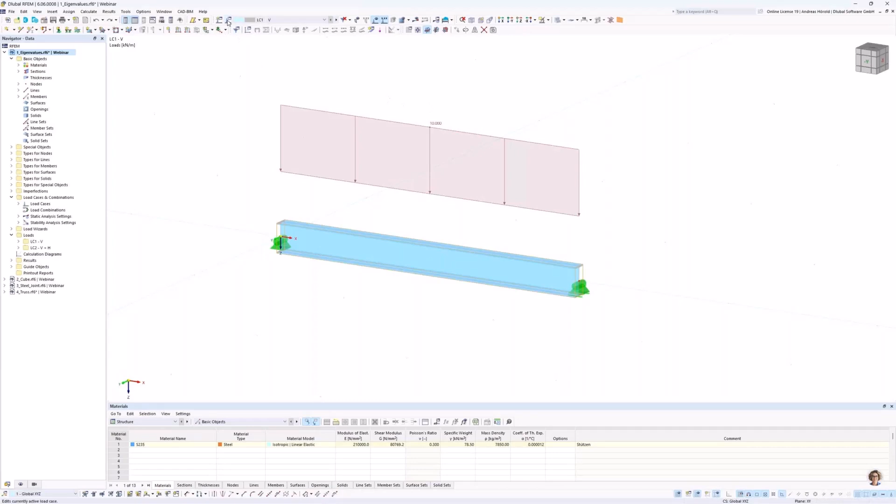I go to the settings before. You can see that 'calculate critical load' is checked with the structural stability add-on. Let's go to these settings. We would like to determine the 25 lowest eigenvalues. Okay, I calculate the load case.

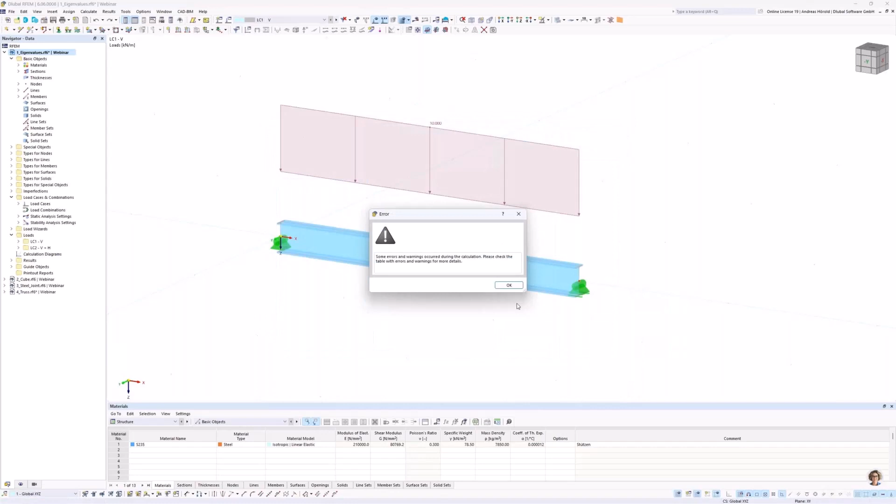There's only a load in the Z direction. So we see that error message, too many buckling shapes. The reason in this case is that no compressive force occurs in the beam, so the eigenvalue solver cannot determine any buckling shapes.

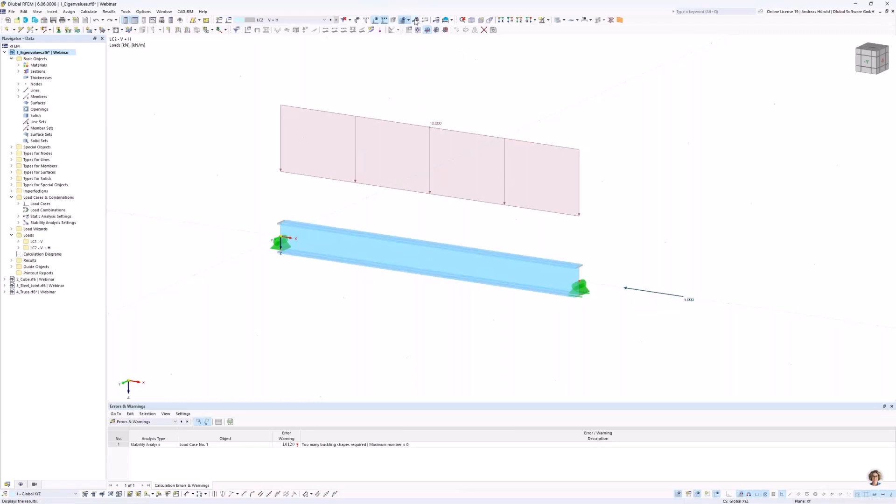Let's turn to the second load case with a compression load. We calculate it. In this case, we don't get an error message—that's the error message for load case 1. We go to the stability analysis, and in the navigator results on the left above, we can see the different eigenvalues. Again, we can go through them.

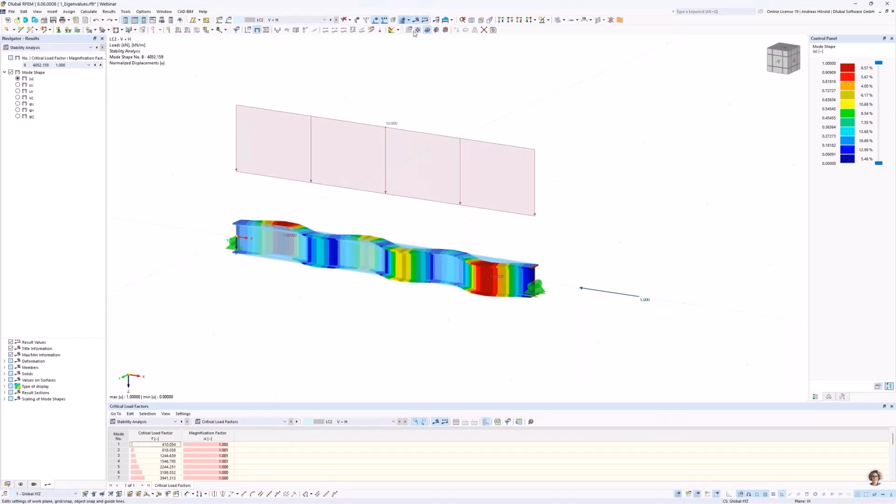But when we go to the FE mesh settings and to the members, there is a member division of 24 set, and we change the value to 2. Okay, and apply. Then we calculate the load case again. Now we get quite the same error message: the maximum number is 14.

Why is that? This is due to the mathematics used in FEM. The global stiffness matrix of the structure has a certain size, which only allows a limited number of eigenvectors and ultimately eigenvalues. Through mesh refinement, the stiffness matrix becomes larger and therefore has more eigenvalues.

Let's change it back again in the mesh settings. I enter the standard value of 8. Okay, and we calculate the load case again.

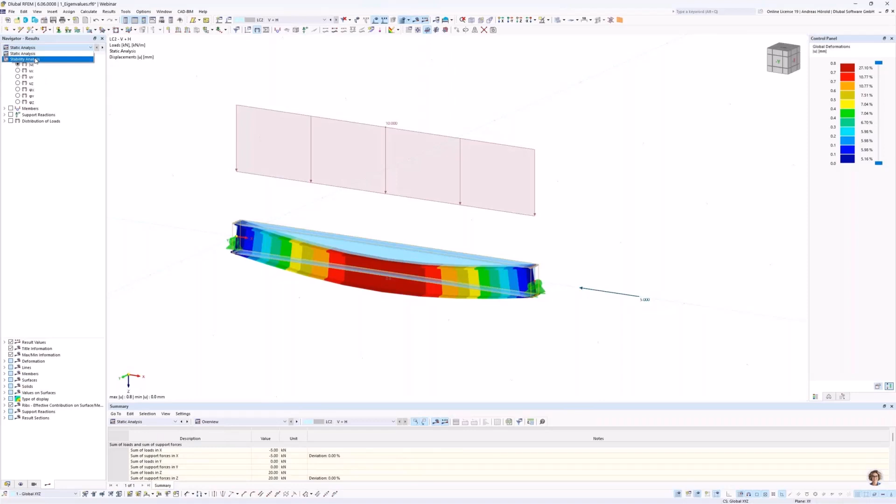In the navigator results on the left above, we change to display the stability analysis results, and we go through the different eigenvalues. You can see that's not a correct or a good eigenvalue because of the mesh refinement or mesh setting of this member.

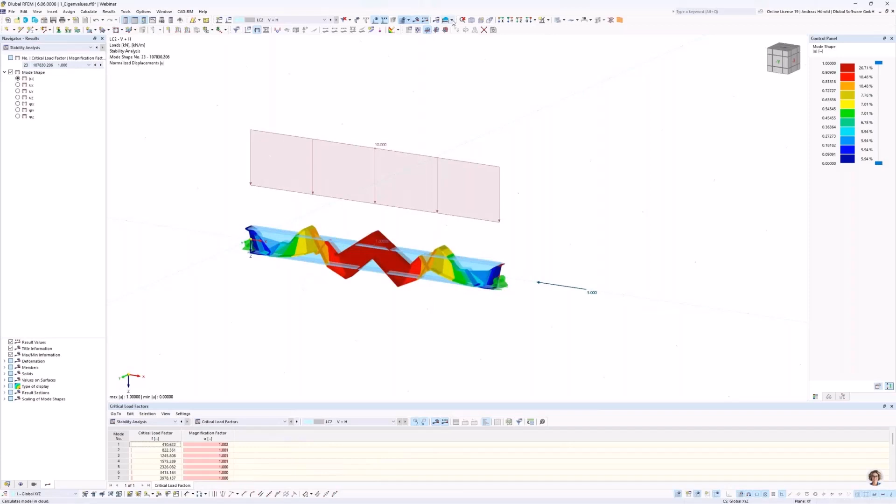I would change it back again—sorry, here, mesh settings, 24. Okay. After the calculation, it should look better. And here, as in any FE calculation, let's go through the eigenvalues.

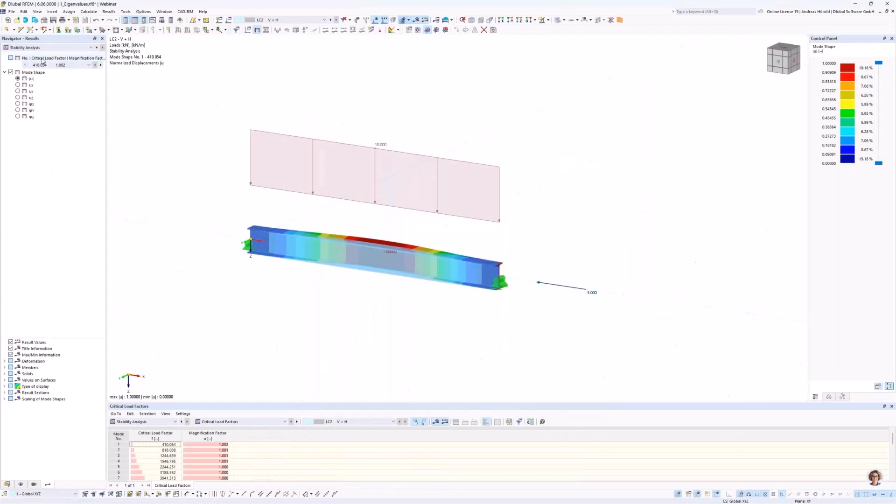Those eigenvalues look quite better. Here, as in any FE calculation, the principle applies that the FE mesh should be kept as coarse as possible, but at the same time as fine as necessary.

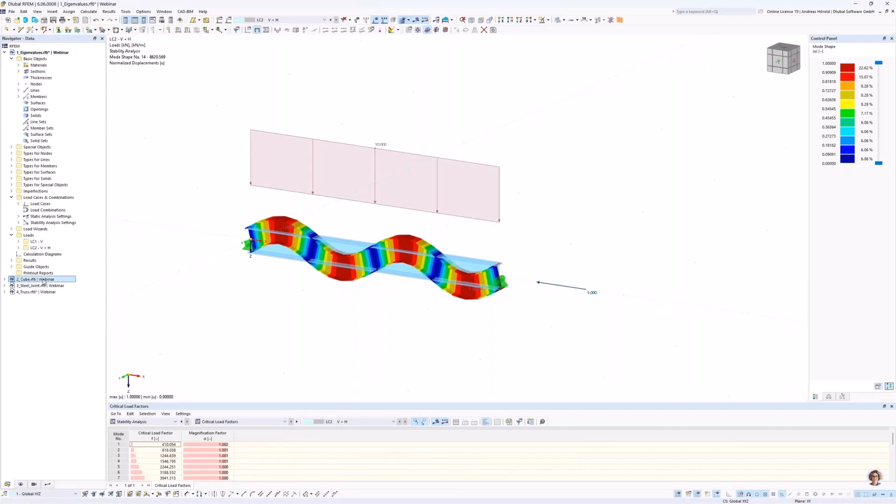Okay, so then we turn to the next model and the next question. Next question is, how can I quickly and easily insert an opening in a solid body in RFEM 6? Now the basic shape here is a cube. We now want to insert a rectangular opening and a rectangular pocket into it.

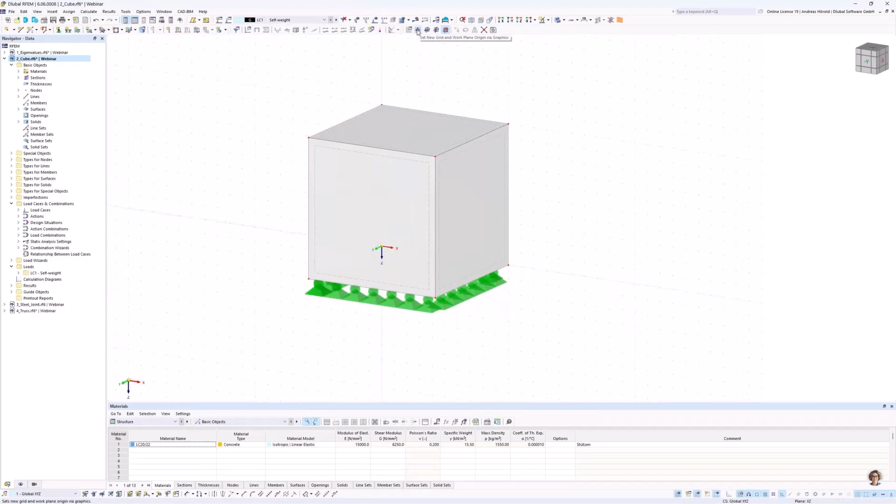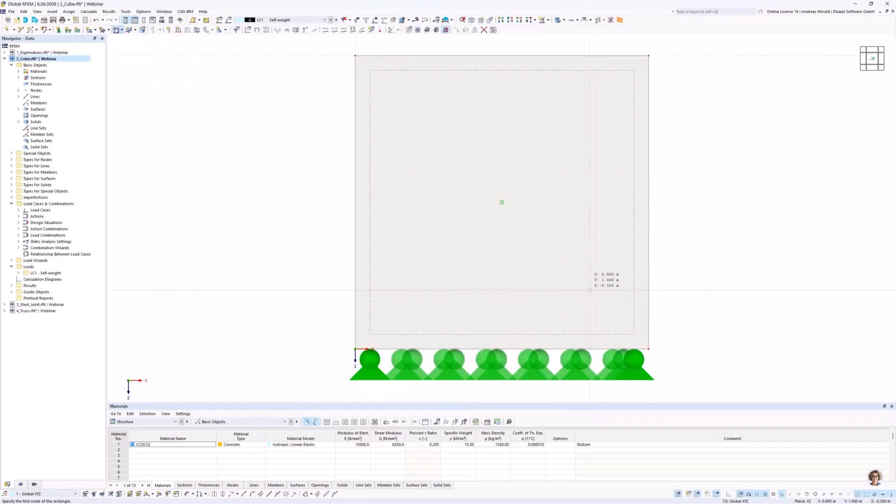So we change the work plane into XZ, and with that button here above, we set a new grid and a new origin. I click on that edge. So, and now the front is our work plane. I change to the -Y view. So, and we start with the rectangular opening left above. So I enter the opening.

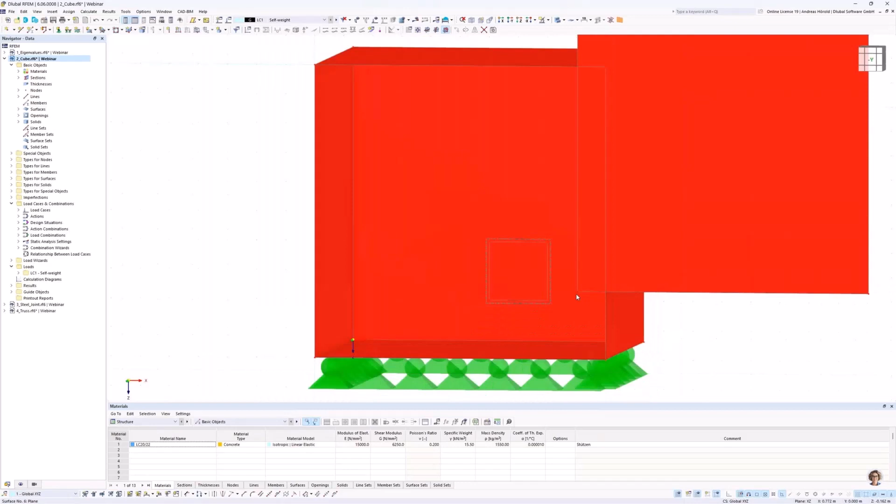And then I would like to copy that opening. Just a small tip. I would like to enter a window around the opening, and when I do that, I destroy the cube, or I drag and drop the surface. How can I avoid that?

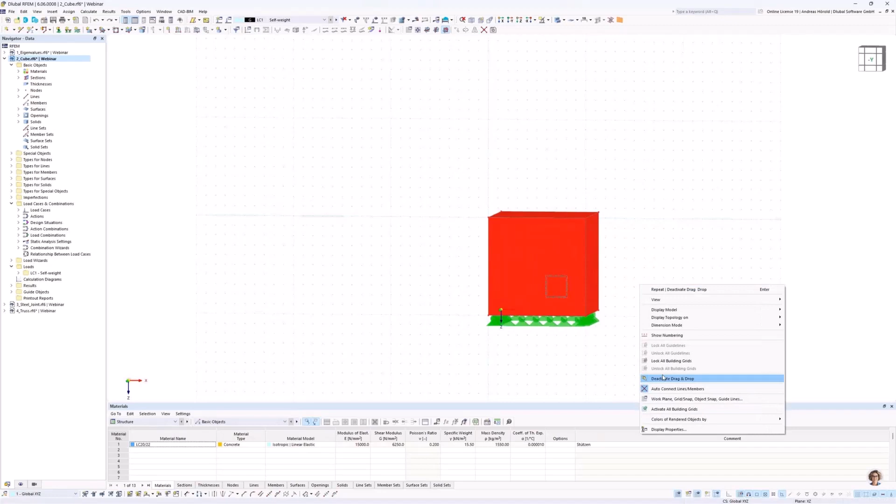I undo that. So with a right click in the empty user interface, I can deactivate the drag and drop function. And then I can select the opening, or the other possibility is I change it back. I activate the drag and drop, and I press the Alt key, and then I can also deactivate the drag and drop feature for this time.

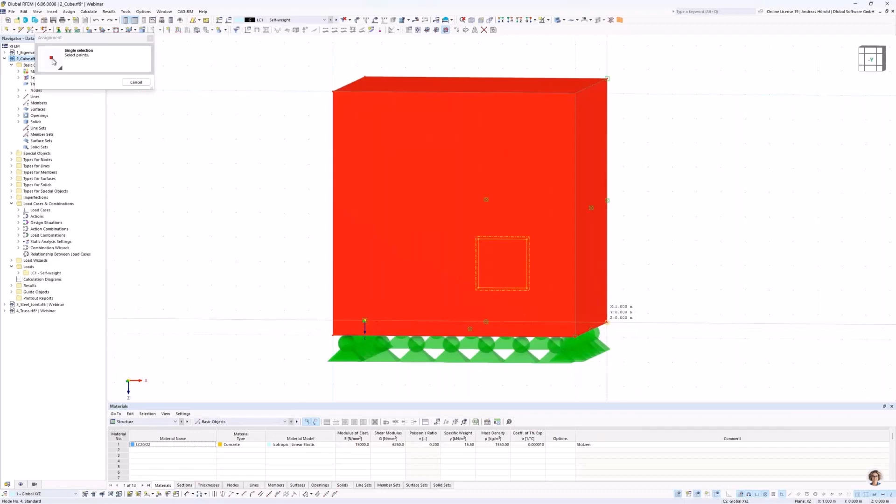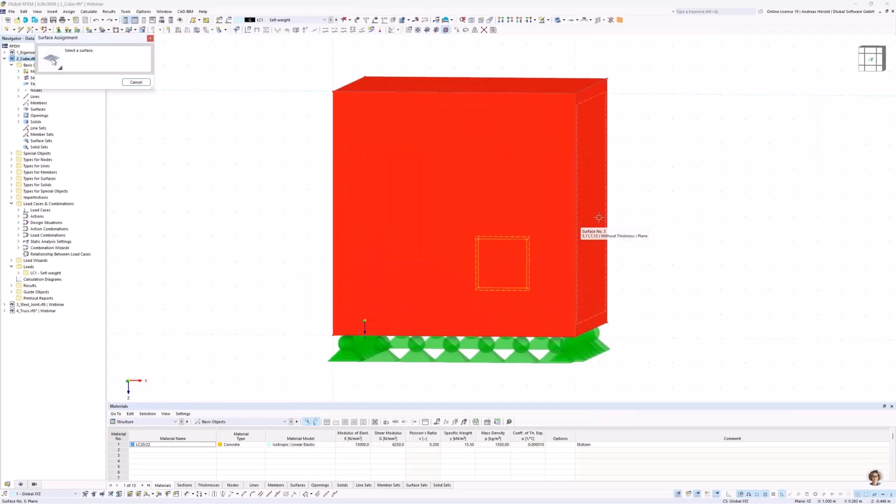Okay, so then above, move copy selected objects. I create a copy. The displacement vector should be from the front to the back. Okay, and I activate the step links. Then I select link nodes with line and link line with surface. And I have to select the surface in the graphic. I select this one. Okay. And that's all. And now the opening is created.

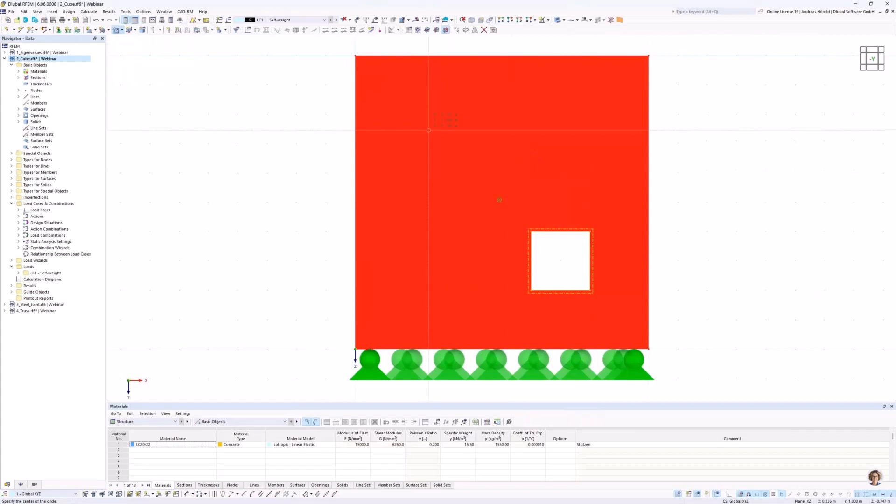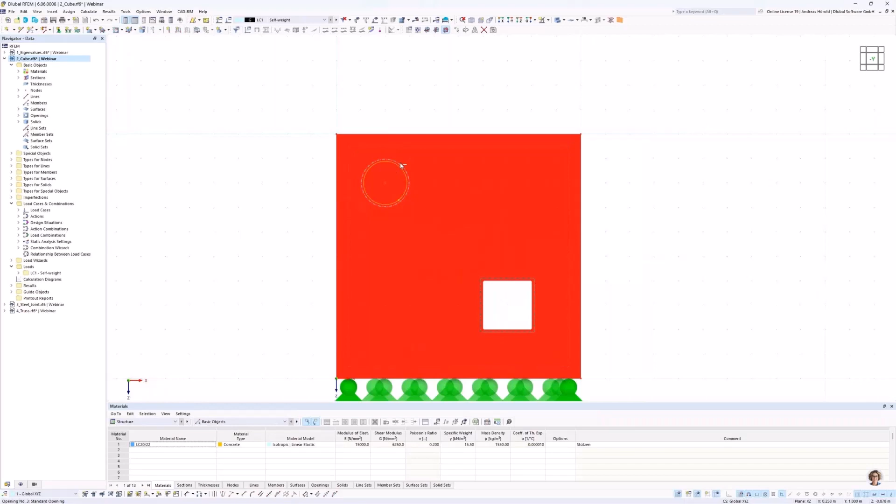So then we continue with the circular pocket, or rectangular. We do a circle. Okay. So let me search the grid. Okay. So that's the opening. And now I select all, but not the opening. I press the Shift key and deselect the opening. I would like to copy only the line.

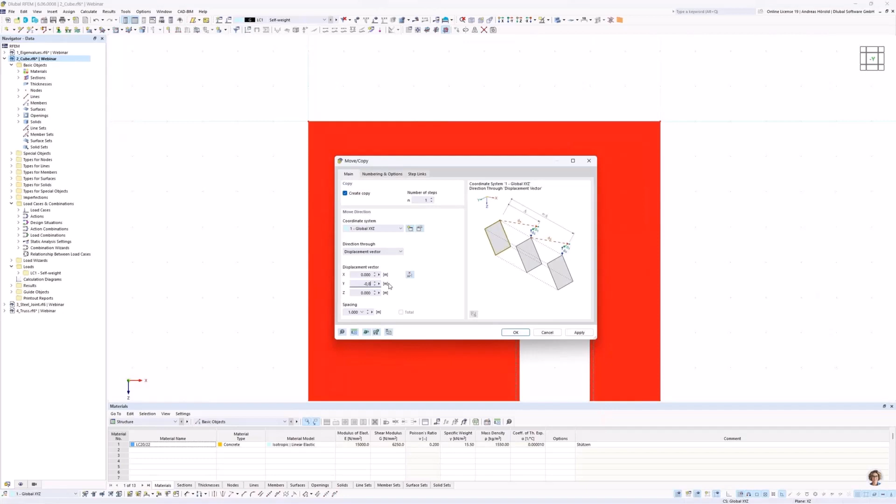So go back to move copy selected objects. The program remembers the last entries. So I enter 0.8 here and leave the settings for the step links. Okay. Now only a circular surface is missing.

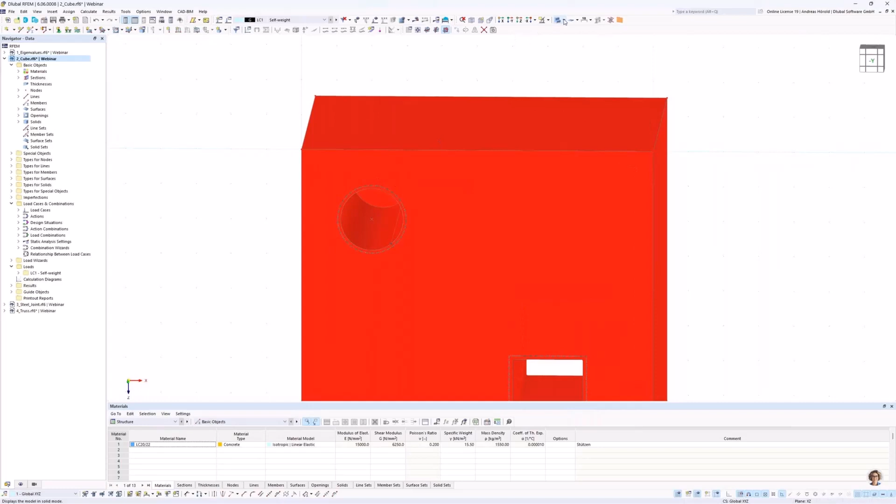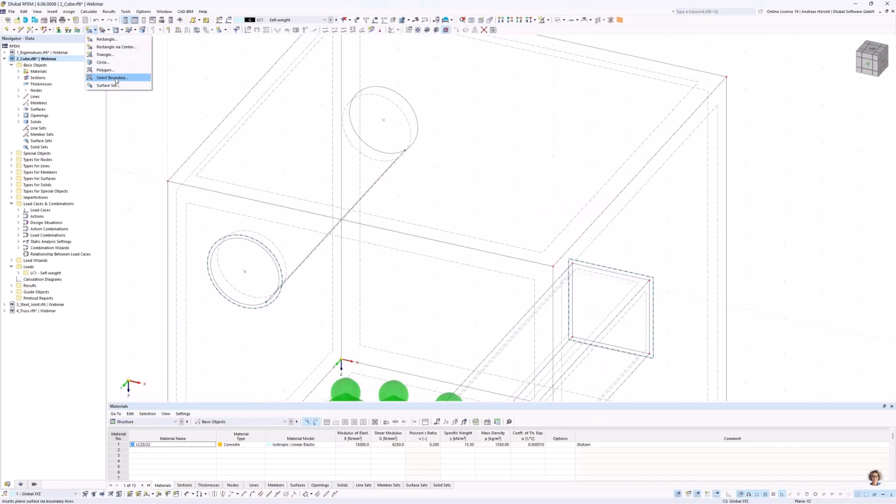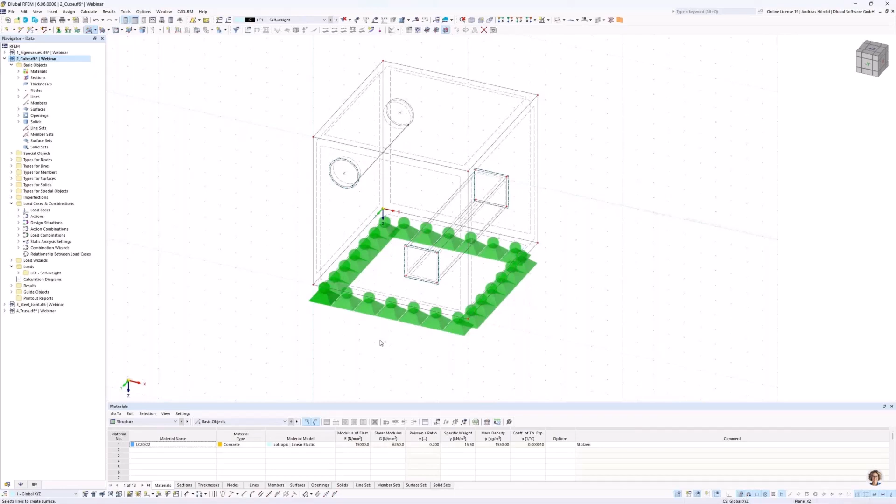I switch to the transparent model, or better to the wireframe model. And you can see there's no surface here. So that's why I select the boundary lines and create a surface. Stiffness type should be without thickness. Okay, and select this line. Okay. So that should be all. So I can go back to the transparent model.

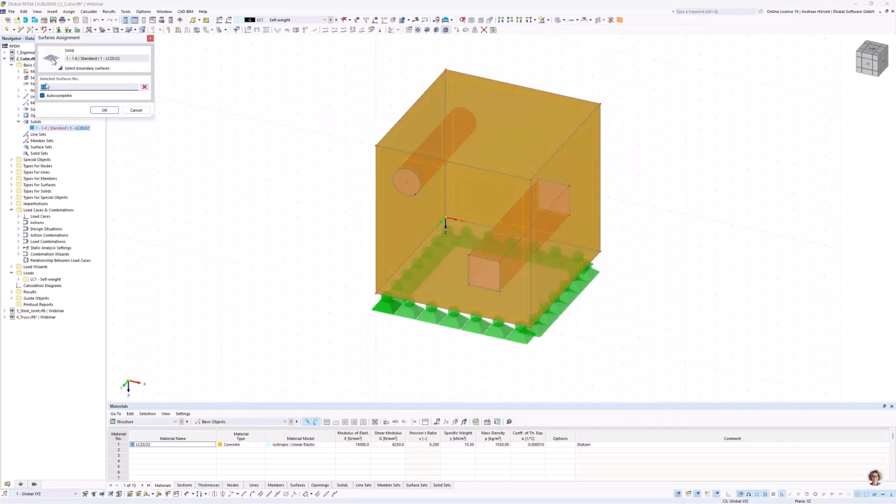On the left side in the navigator data, you can see the solids, and now it's in red color. The solid is not closed anymore. So how to correct it? I double click on the solid and I have to select the new boundary surfaces. So I clear it. Okay. And select all. And now all is correct again. We can mesh the cube. Now the solid is complete, and we could calculate it.

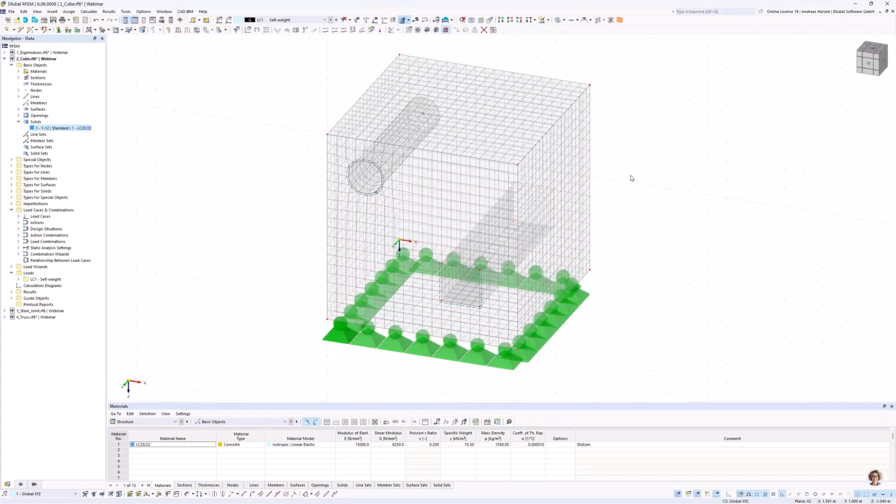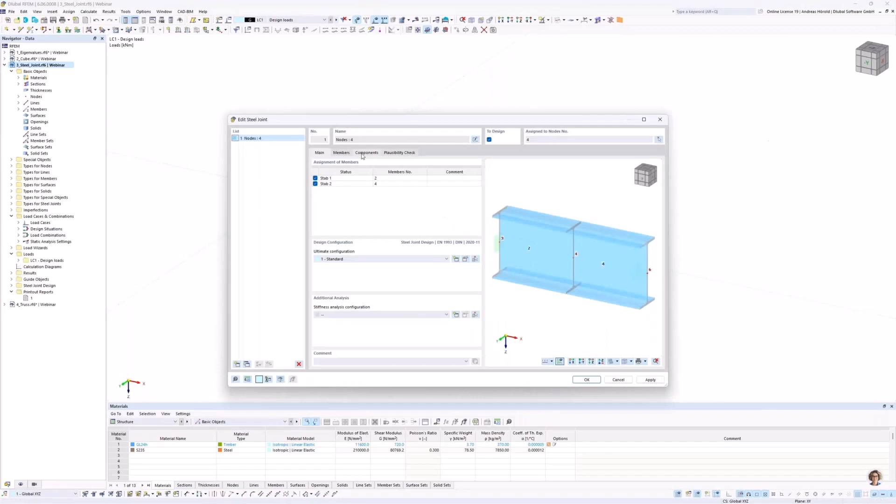Okay, then we turn to the next model. That's a simple steel connection, and the question is, I have modeled a steel connection and would like to include a dimensioned sketch of it in the printout report. How do I do that? I double click on the steel joint. I can see the components. So let's go to the view in -Y direction. No, in the X direction.

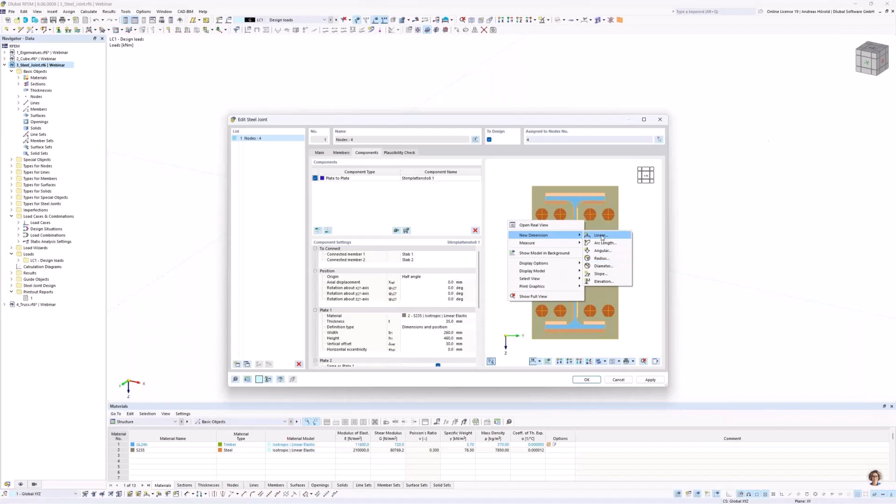Okay. And now we want to dimension the screw spacing. Now that's a quite new and often wished feature. So I do a right click in the free space, and then I can enter new dimensions. I can add linear dimensions, angular, radius, and so on. I create a linear dimension. So I click on the edge and the middle of the screws.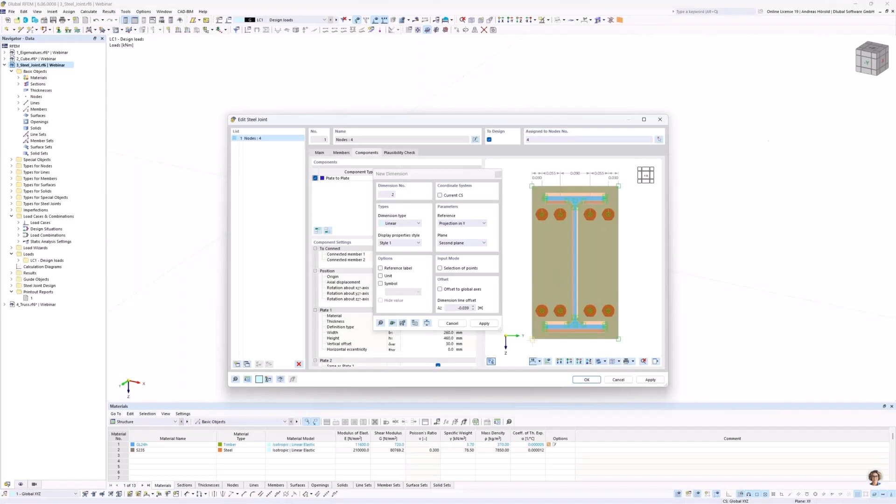Okay, then I choose the projection in Y direction and second plane. Okay. So then in the next step, also the vertical dimensioning. So projection in Z and first plane. Okay.

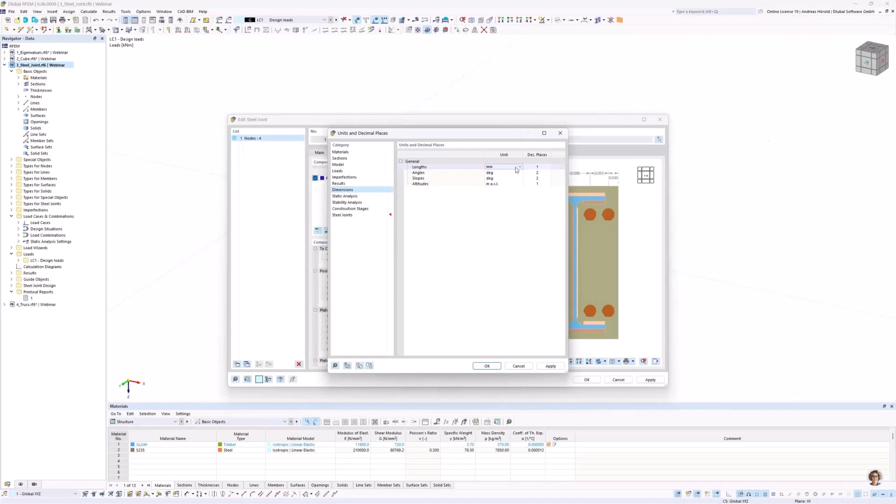Now the dimensioning is in meters. Now I would like to change that to millimeters. I go left at the bottom to the button units and decimal places. So I go to dimensions and change it here from meters to millimeters and change the decimal places to 0. Okay. That looks quite good. We save all with the apply button.

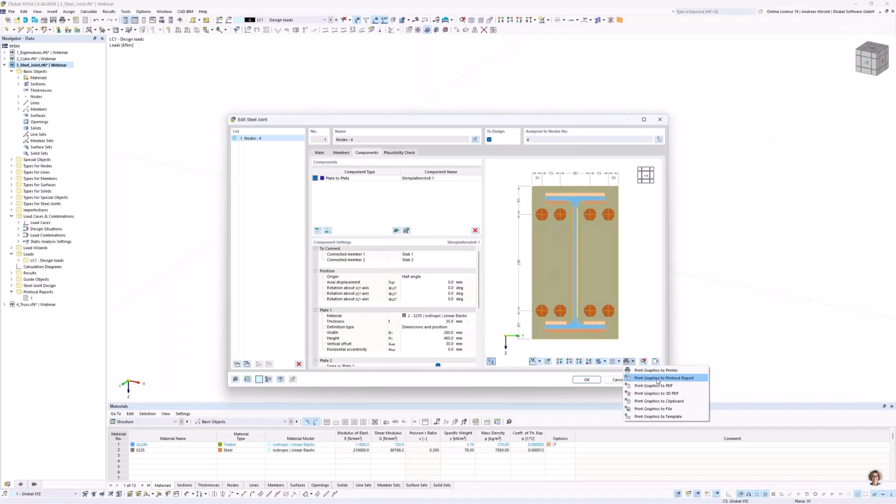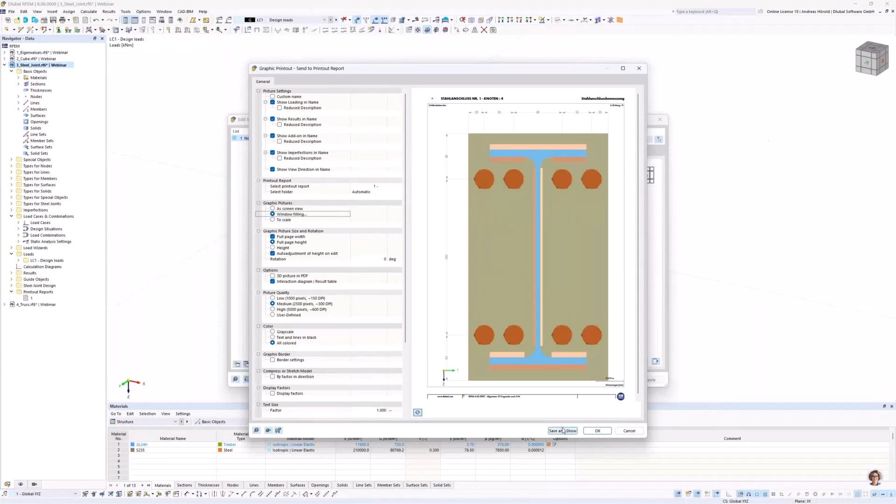And now we can print that graphic in the printout report. Yeah, you can print it directly to the printer and so on. I print the graphics in the printout report. Okay. Now that's the preview. That looks quite good. I change it to window filling. Okay. Save and show. And now the printout report is creating.

And we can take a look in the printout report. So. Okay. That looks quite good. The name is still in German, but it doesn't matter. Okay. So then that's all for this question.

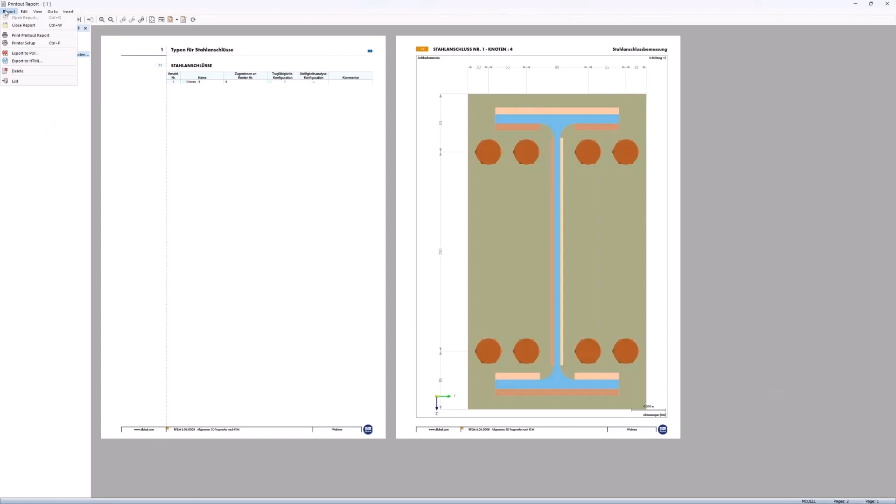The next question is, how can I share my user-defined settings for the cover page and header of the printout report with my colleagues? I go in the menu to report and printer setup. So, and you can select, for example, header. And you can also upload your own logo, the logo of your company, for example. You can change the first line.

I change it to Dlubal Software. Dlubal Software GmbH. Then Am Zellweg 2 in Germany, 93464 Tiefenbach.

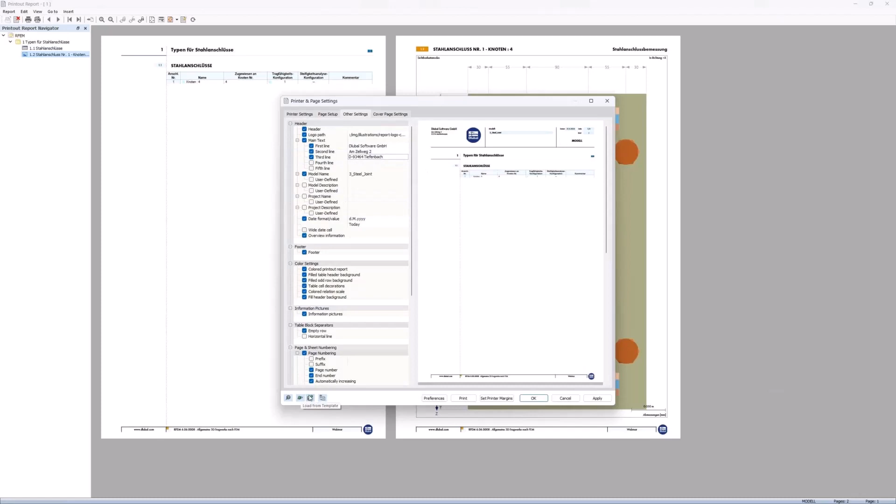Okay, and I can save that with that button, save as template. User-defined settings 1, for example. Okay, so and now I turn back to the program, to RFEM 6, and I go to Options, Export GUI Settings, and I deselect all, and then I select Templates for print settings.

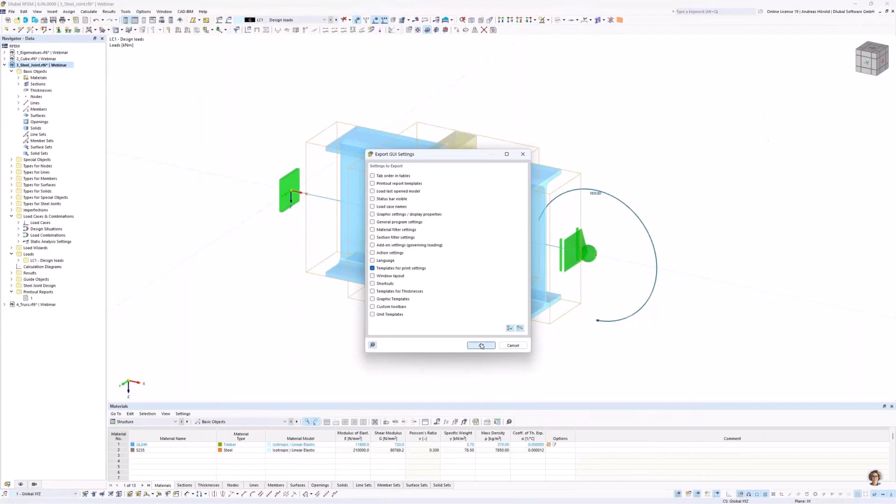Okay, and I can save it with user-defined GUI. Okay, save it, and then you can save or send this file or share this file on a server and share it with your colleagues, and they can import it with options and then import GUI settings. The same workflow.

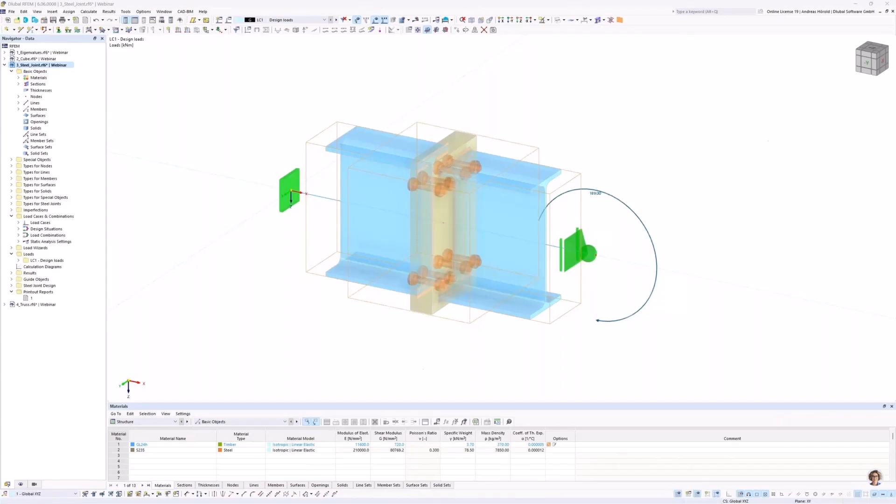Okay, so then we turn to the next question, or the last question. Last question is, how do I best formulate my questions to AI assistant Mia so that I receive the most precise answer possible? So let's go to the website. I go to support and learning and to frequently asked questions. I search for Mia prompting. We created a certain FAQ for this question. Let's go to this FAQ.